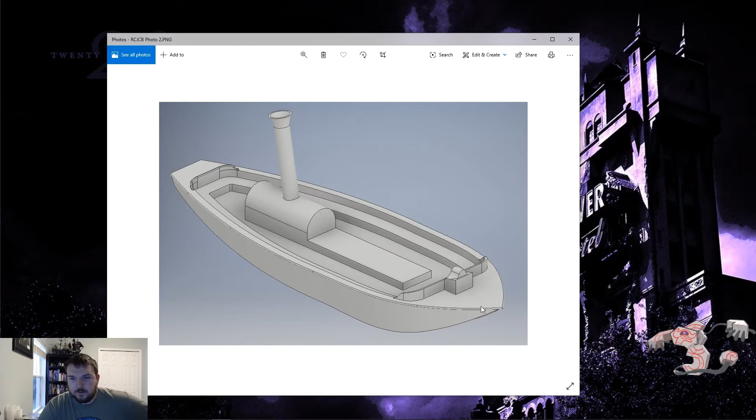Whoop, I just zoomed in on the front. Oh hey, look, there's Rodriguez. This is earlier in its lifetime - I think I did this on the first day. Started adding some of these details here, giving you a side profile.

Here's the boat - bottom needs to be thicker. So the design is kind of there, we're already there with the design. Now I've got to start building it, and I've got to start on the other end programming this thing. So I think for today, I want to create a timeline with some due dates, and make sure I can go to Home Depot and pick up stuff that I need to pick up.

I want to set aside time, like an afternoon or a whole day, to start cutting wood down and shaping it up the way I need it to look. That's going to be an interesting process. I don't know how this is going to work. Ideally, everything would be in the hull of the boat.

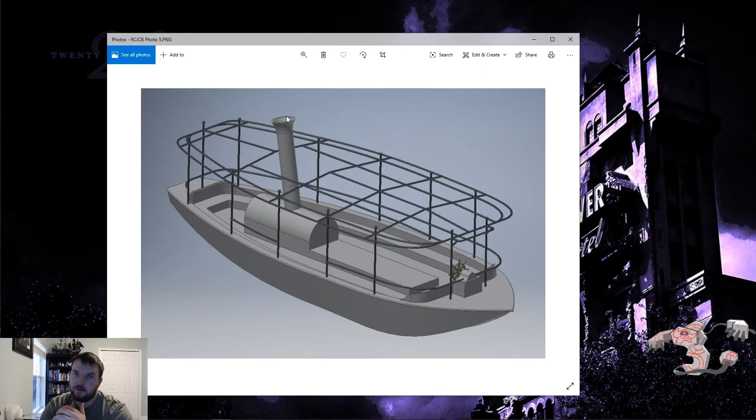It would be cool to have some sort of antenna attached to this, but from what I remember, the Bluetooth antenna isn't that big - it's actually pretty small, just wires into the Arduino. So this is going to be a lot less interesting because instead of doing designs, I'm going to start putting together a system and a timeline.

Hopefully this might correspond with video updates on the channel. Don't hold me to that, because getting things done and editing and uploading a video are two different beasts. I might get something done by February 15th, but the video might not be up for another week. I do have a busy life. I want to do this as a way to grow my design and manufacturing skills even more.

I'm going to start brainstorming what kinds of things need to happen. So I need... redesign. Let's see if I can zoom in a little bit. Okay, so I need to do the redesign for the boat hull.

I need to check if my Arduino works - I might have accidentally blown it up. So actually I should just say purchase new parts.

This includes Arduino, and what else... wood for the boat, and this wireframe thing I've got going on here. I don't know how I'm gonna make that - this guy. I initially thought about just using a hanger wire, that was kind of my idea.

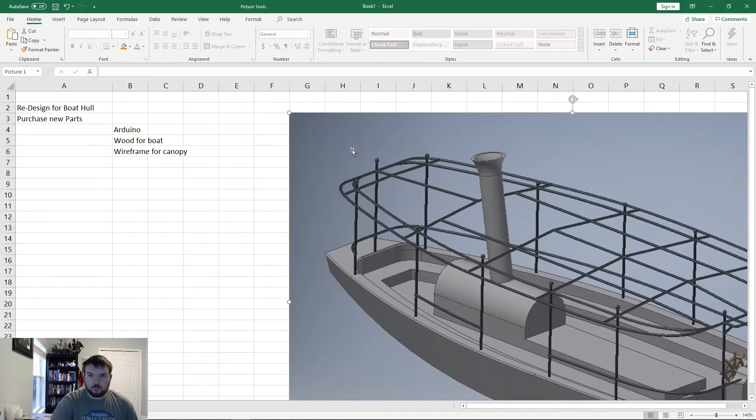So wood for boat, wireframe for canopy. Let's see what else do we have going on here. Let me bring this over here - actually, could I just copy? Boom, alright, so we'll be able to look at this together. So I have a whole bunch of wiring still, and I did buy a pack of motors, little brush motors I think, not stepper motors. Also I'm not 100% sure I know all the right terminology.

I know stepper motor is one thing, I thought it was brush or brushless motor for the other one. Basically, a stepper motor you can tell to go to a position - it does a number of rotations to get there, whereas brushless you just tell it to spin. So to my understanding, and this may be a lesson learned during this, we'd want the brushless motor to be the propeller, and the stepper motor to be the rudder.

I believe that's what we would need. So I'd say just double check for motors. Then I also need to program the Arduino, and then complete wiring, and then begin construction.

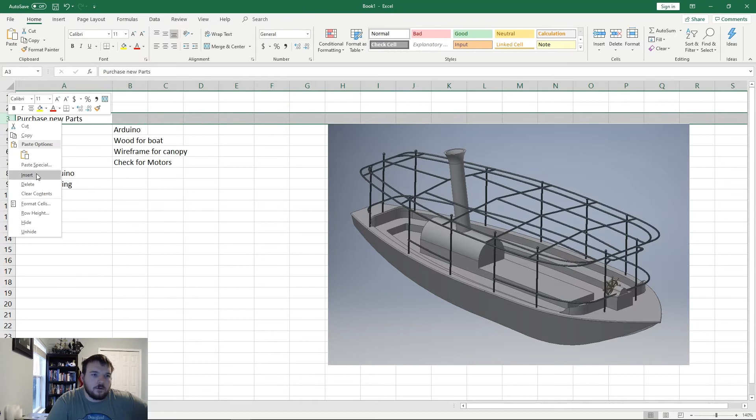Not construction, because I still have to make the parts to make the boat - so really begin redesign for the boat hull. That'll be the physical changing of the whole design, and then I can start. Actually that should include - insert hull design, and then we'd also put break into parts, more or less. That's sort of an intense way of saying it.

And then I would probably want to make some drawings so I have something with dimensions to work off of. Complete or program Arduino, complete wiring. Alright so test controller circuit. Oh, purchase new parts.

I was using the battery tray from the original boat I bought at Target, but I think I want to just buy a new compatible pack of batteries, batteries compatible with our Arduino. So this is kind of like a checklist, I think that's probably it.

So I need to do the controller circuit - this is like a separate thing, right? So we have buying stuff, designing stuff, the electrical and programming side, and then we have the actual construction.

Fabricate boat pieces, I guess, and then assemble pieces, and then I would say a float test - I want to make sure this thing floats before I start putting electronics in it. I'd probably just test the flow of water in the hot tub or something, and if it floats and there's no leaks, then I guess we could install all the electronics.

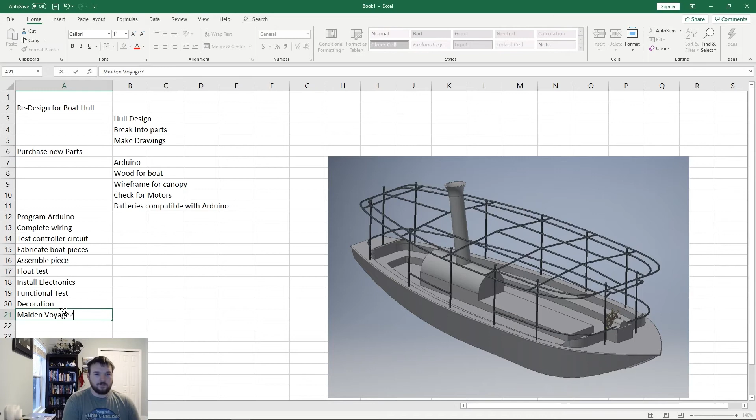Okie dokie. So now that we have a pretty decent breakdown of what's going to happen here, I will probably put together some steps for each of these. Some things that I plan to do that I would like to see happen. And that will probably actually be in a Word document, not in Excel, just because of the way that the formatting works. But let's see if I can start assigning some dates to these when I want these to be done.

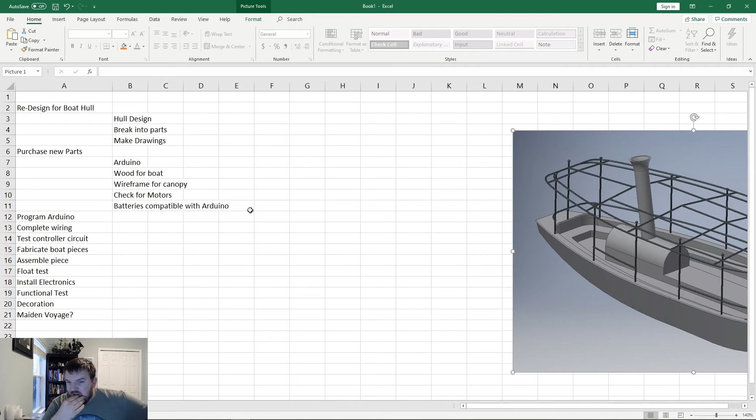I wonder if I can pull up a calendar. There we go. Alright, so we can start looking at some dates for everything. So we are currently on February 1st. We want, let's see, so the redesign for the boat hull, I bet you that could be done in a couple weeks. I think that I can have the redesign done by the 15th, and if I am able to break it into parts and start making drawings, that should give me an idea of what wood I would need, and we can start looking into these guys.

You know what? I wonder if I can, let's see, model the electronic components too. So if I can model places for the Arduino and other stuff to be mounted to, that might not be a bad idea. So model electronic components, and then

make final assemblies. Make final assembly and then make the drawings. Okay, so then I would have a list of all the different parts, and I know what they look like and what I need to do to make them, and I know how this whole thing is supposed to go together, right? So I'm not actually just throwing stuff together willy-nilly.

I'm actually going to the store with a plan. I say I need this much wood because this and this and this can fit on one piece, and this can fit on one piece, and I need to use these kind of pieces for this. So yeah, I think this is the right call. So I've got the whole design. I'm going to break the hull into the parts.